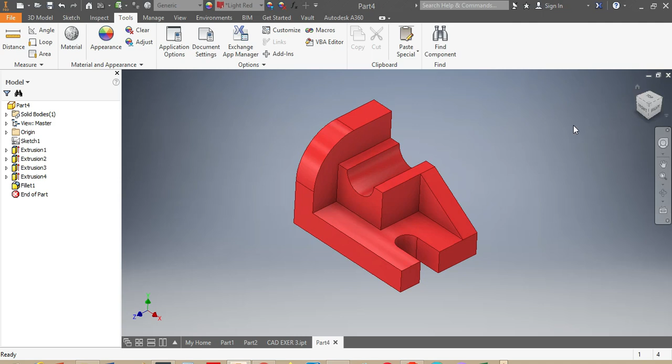Hi, let's draw this drawing that we see in front of us. Okay, so I'm going to show you the dimensions and they are in millimeters. So this is how the drawing looks like. You can take a screenshot so you can be drawing this together.

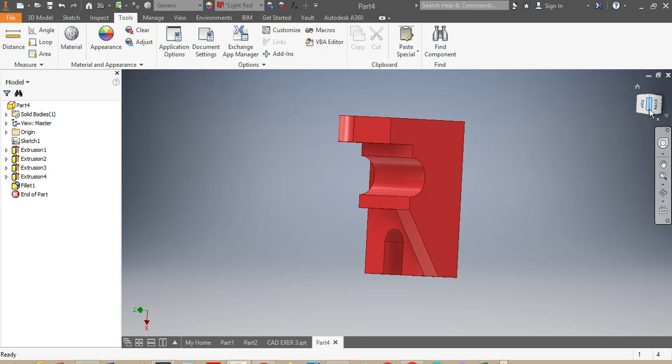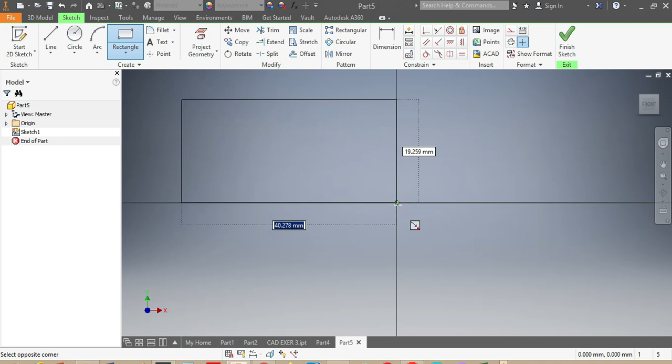So I go for metric standards, millimeter, and then I say create. Once I'm here, to make it easy, I'm going to start with a rectangle. So there is my rectangle. Once I have the rectangle in place, I'm going to have to give dimensions.

So from there, that one needs to be 96 millimeters. Enter. 64 millimeters, right? Great. Once I have those, I'm going to go for another rectangle.

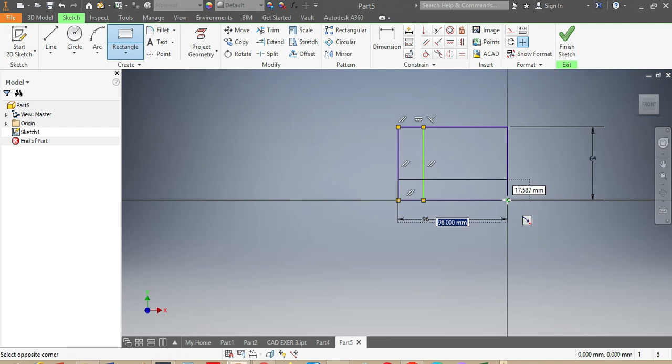So that is my rectangle, and then I'm going to go for another one. That is my rectangle. I can go for another one again, you're going to understand why. Now I'm going to give dimensions.

So this one here, from there up to there, needs to be 16 as per our sketch. If you took a screenshot, this is helping you already. That's one, escape. That's my mistake. So that one needs to be 16 as well, and that needs to be 16 as well.

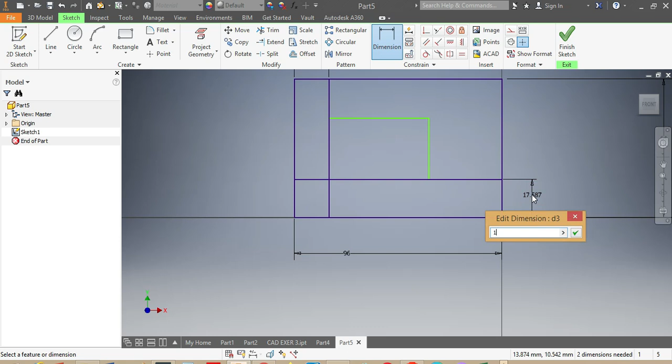So once that is 16, this one here needs to be 28. That needs to be 28, right? And this needs to be 40. Okay, this needs to be 40.

And I come there, I choose a circle because I need this spot here, I need that spot over there. I come back here, then there is my circle.

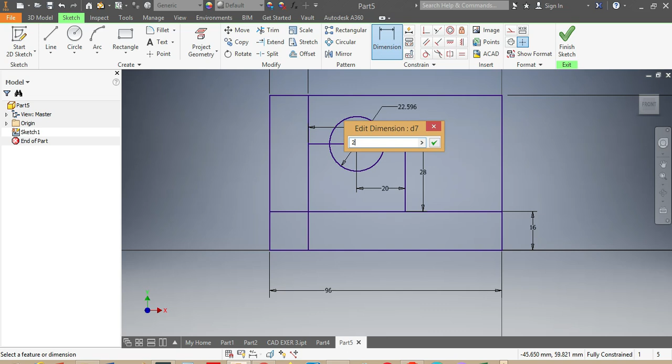And I need to make sure that the circle there, from there up to there, needs to be 20. That needs to be 20. And the circle here needs to be 24. 24. Great. What next?

Okay, so that is done. What I'm going to do now, I'm going to have to draw this line here. This line here goes up to there. This line is for that spot over there. I come back, right? So that is done.

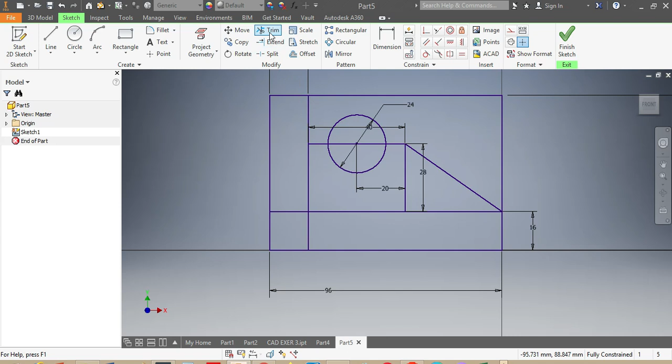Then I want to remove anything that I don't need. I go and trim there. I'm going to trim that spot which I don't need, I'm going to trim this spot which I don't need, I'm going to trim this spot which I don't need, I'm going to trim this spot. Okay, so that one is removed.

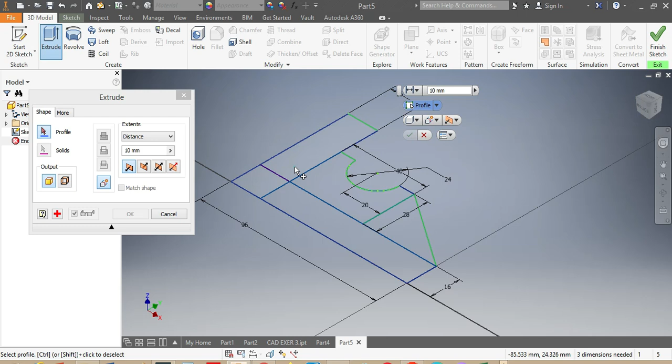Then the next thing that I want, I need to add dimension to my drawing. I'm going to come here, I see 3D model, I say extrude. So now I want to extrude that part, I want to extrude this part. And this one here needs to be extruded by 64 millimeters as per our drawing, 64 millimeters.

So once that one is done, I want to get the other part that I drew. What I'm going to do is I come there, I say sketch visibility. I come back there, I can see that spot. I say extrude now, I want to extrude the spot.

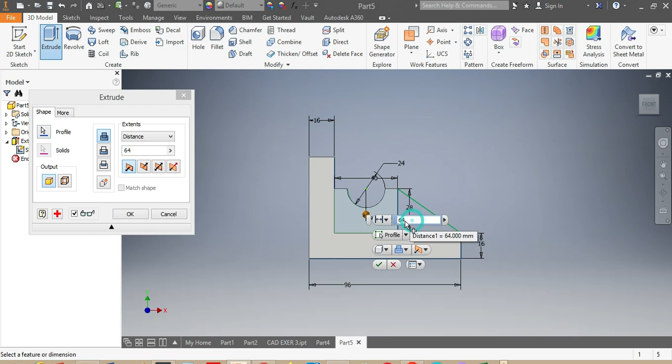So the spot here needs to be extruded by what? By 44 millimeters.

Okay, 44 millimeters. Again, I say extrude. I want the spot here. Let me see that spot there to be extruded by what? 12 millimeters as per our drawing.

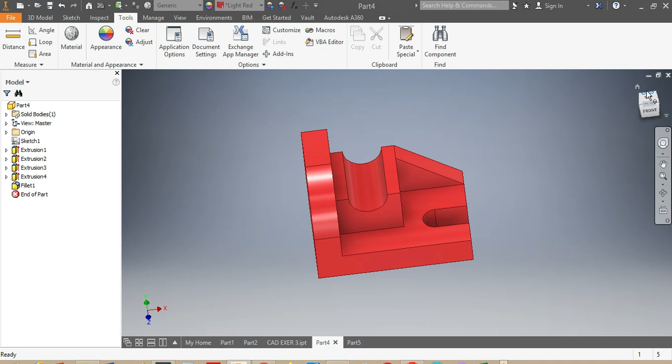12 millimeters, great. So once that one is done, I need this spot here. So I come back again. Here I'm gonna go on the top part, then I go on sketch. I come here, right click, I say new sketch.

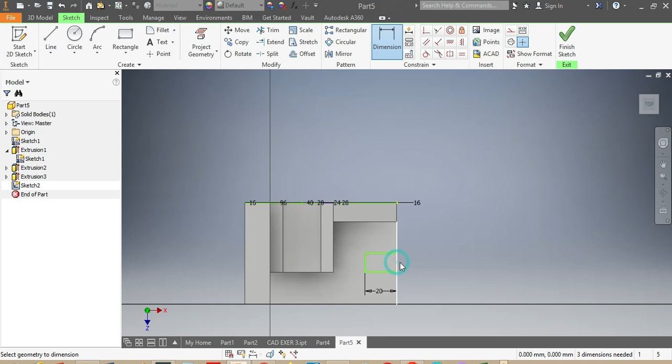For the new sketch, there I take my rectangle. There is my rectangle, there we go. And I want now this one here to be 20 millimeters, 20. And this one here need to be 16.

Great, I say okay. And as per our sketch, from there up to there, that need to be not at the center, okay, but need to be 16. As per our drawing, that need to be 16.

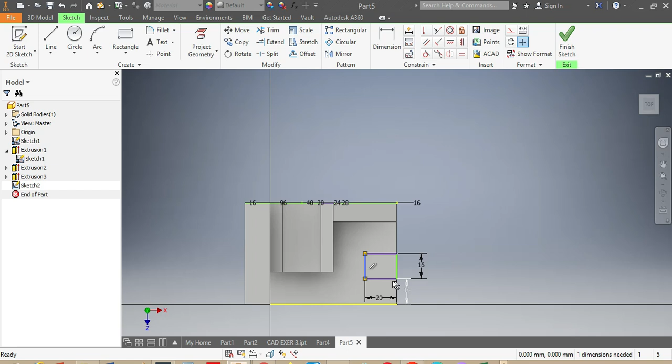And then again, I want to remove this spot. Okay, I remove that spot. That spot is removed, as you can see. Come on, I need this thing here. So what I'm gonna do is I'm gonna select a line, then I come here, I click, and then I hold. When I hold, I come here, I do this. I join up to there. Okay, so that is great.

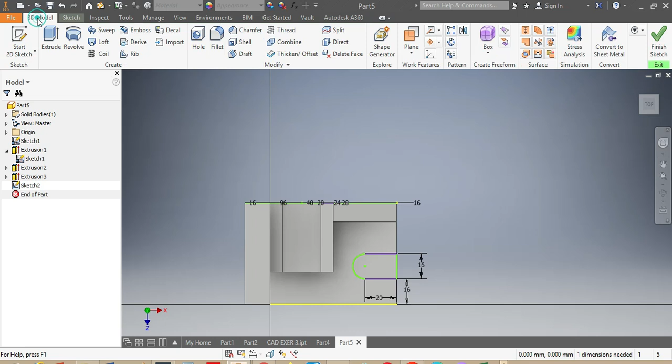That is done. Then I say 3D model, I say extrude. And then I click on the drawing that I just did, and this one there need to be extruded by what? It need to be cut out. So I'm gonna say, let's say 40. That's fine, I say it to be cut by 40. Then anything that I say need to go both sides, that side and that side. Then I say okay, right?

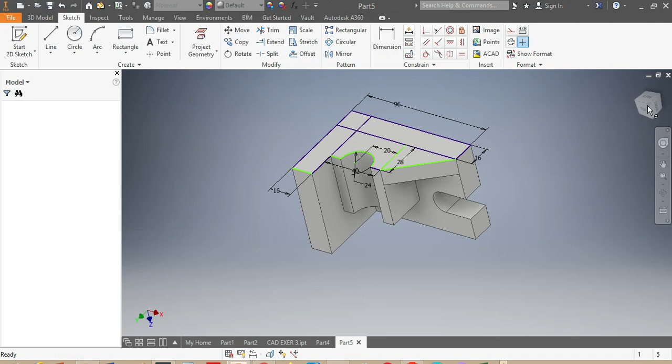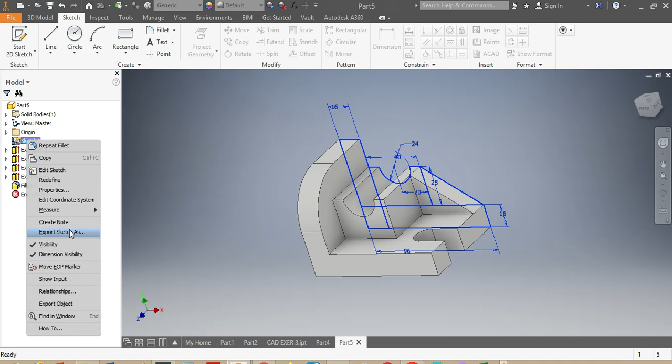So there is the frame of our drawing. So the next thing that I need now, I need to kill this corner, the corner over there, by a radius of 32 millimeters, right? I say okay, so now I want to remove those dimensions, the ones that are written there. So I go there on the sketch, I right click on my mouse, I say visibility, I tick it off, then there we go.

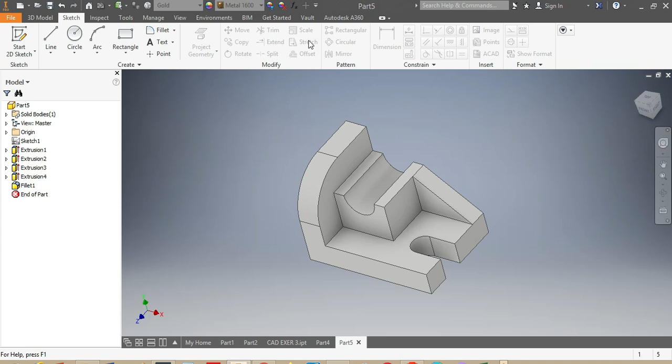So now you want to give a certain color, a certain material to your drawing. So let's say you want to give it a material. What you can do, you go on material, let's go for gold. I always like gold, so you can give it gold. Or else what you can do, you can give it color. It was red, so let's go for a color. I go there, right, then I say red.

So I choose the whole thing. I choose the whole thing for red, you know. Or else I can escape again, I don't want this. What I can do is I come there. I want just a color, light red.